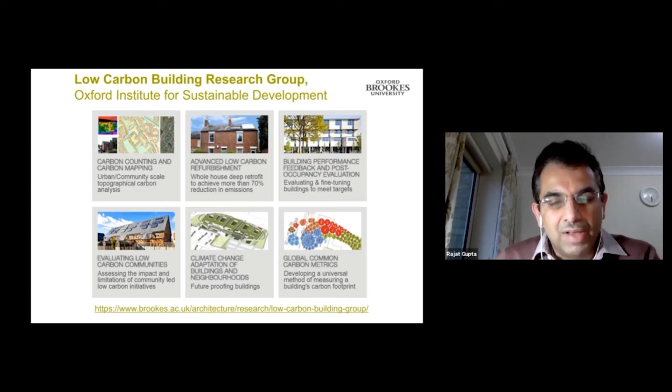I run the Low Carbon Building Research Group, and I'm also lead for the Oxford Institute for Sustainable Development at Oxford Brookes University. We have a range of themes we address through our research, whether it's low carbon or low energy mapping, looking at low carbon refurbishments in terms of both advanced refurbishments and also scaling up retrofits at neighborhood city scale. We've developed a lot of local energy mapping approaches for this.

We also look at smart local energy systems research and low carbon communities, focusing also on climate change adaptation of buildings and neighborhoods, so looking at climate resilience. A key area of our work is looking at care settings and the older population at the moment. We're also heavily involved in measuring indoor air quality and productivity in buildings.

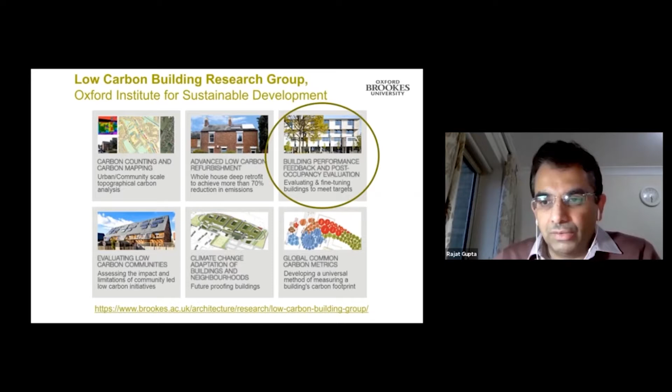A core part of our work is looking at building performance evaluation and post-occupancy feedback from buildings. We've done numerous studies, probably covering more than 500 buildings now internationally. And that's what I would like to reflect upon.

I'm also leading a lot of research in India in terms of sustainable buildings. Recently, we finished a project called MaS-SHIP with TERI and Development Alternatives, as well as UN Habitat in India. MaS-SHIP is really a project looking at mainstreaming sustainable social housing in India. We've developed a new sustainability assessment tool and a decision support toolkit for housing developers and government agencies to be able to design and deliver sustainable social housing in India.

Because as you know, there's going to be an explosion of housing under the Housing for All initiatives, and it definitely needs to be sustainable. For the first time, I think we also conducted resident surveys at large scale across some of these social housing developments. And we gathered some data on lived-in experiences of residents. There's a website, you can get a lot of information there.

The other project I'm doing is called Reside, which is a 5-year project with partners in Jaipur and Hyderabad. Essentially, this is looking at residential building energy demand reduction in India. We are looking at all aspects of residential energy use, right from the form, the building envelope, looking at appliances inside, and most importantly, occupant behavior.

We're developing protocols for post-occupancy evaluation for housing as part of the project, providing for the first time a large knowledge base for the residential energy code and its improvement and evaluation. As part of the project, we'll be monitoring about 2,000 homes across all climatic zones in India, looking at their energy and environmental performance, as well as contextual data, and then building models both at community level and at dwelling level. This project is continuing. Again, there's a website there for you.

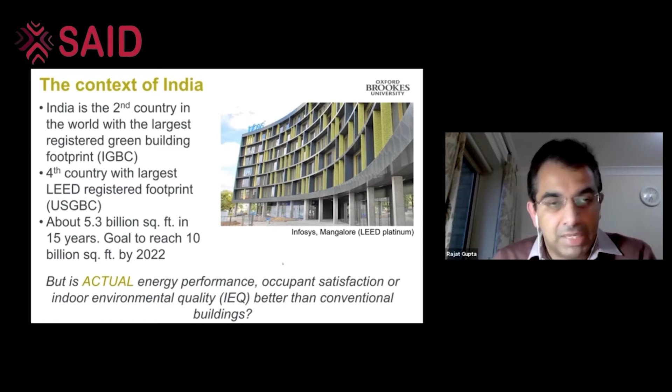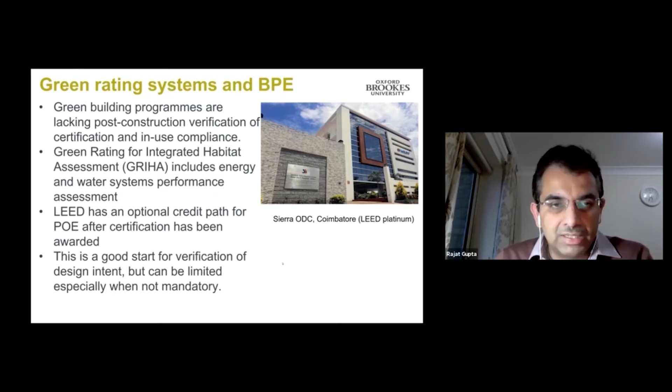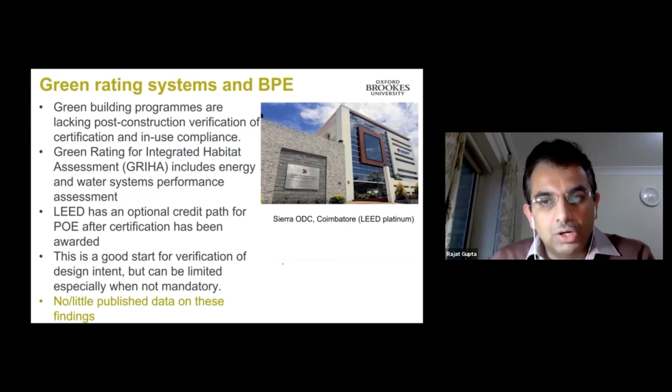So in India you have a range of green rating systems. Most of them lack post-construction verification of certification and in-use compliance. GRIHA, the indigenous system we have, does include some aspects of energy and water systems performance assessment, but it's not a mandatory requirement like in LEED, which also has an optional credit path. So this is a good start for verifying design intent, but because it's not mandatory, this can be limited. And as I said before, there's very little published data on these findings - I think that's one of the major issues we have to address.

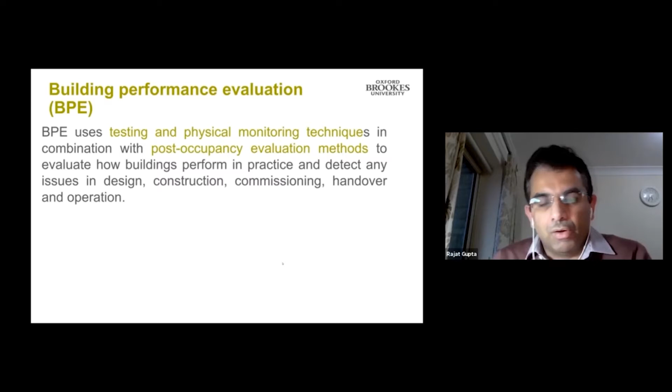Building performance evaluation itself, what does it really mean? It's really an approach which is very empirical and evidence-based, grounded in the real world. It uses social science and building science techniques to test and monitor, in combination with social science methods like surveys and interviews with occupants, to really evaluate how buildings perform in practice and detect any issues in their design, construction, commissioning, handover or operation. Essentially, findings from such studies can help fine-tune building performance, meet design targets, improve occupant satisfaction, and close the gap between simulation and reality.

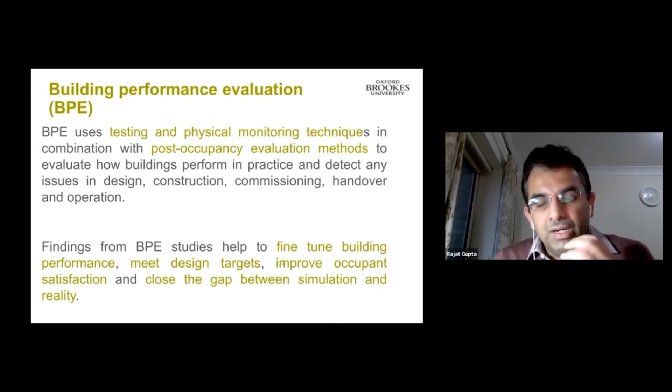It's not easy to do because your lab is really the real world. There are lots and lots of dynamic factors at play because you can't control all the variables. So you need a lot of multidisciplinary approaches to be able to do a good building performance evaluation.

So this is where we come in. We designed the LearnBPE research initiative as a UK-India collaborative project funded through the Newton Fund. The main aim of the project was to develop new knowledge, tools and skills amongst researchers, students, practitioners, engineers and architects, to be able to evaluate actual performance of green buildings, to start with, in India, and validate these through student-led field studies. We were passionate about getting master's level students to look at actual building performance as part of their dissertations and build this kind of evidence base.

Just to stress, I'm not just talking about green buildings only - you can apply the methods to any building, it doesn't really matter. It's Oxford Brookes University and CEPT University leading it. We also had a series of industry partners: TERI, Terraveris, Edifice, and ASHRAE India was also a partner in the project. We've produced a lot of outputs and they are available - I would welcome you to visit our website and download some of the papers, and you can see the final report as well that's published there.

We were very pleased that while the project was ongoing, our professional body CIBSE, the Building Service Engineers body, took on the LearnBPE publications and produced another paper talking about this new approach we had developed, called IBPE, for the Indian context. And I'm going to tell you all about that.

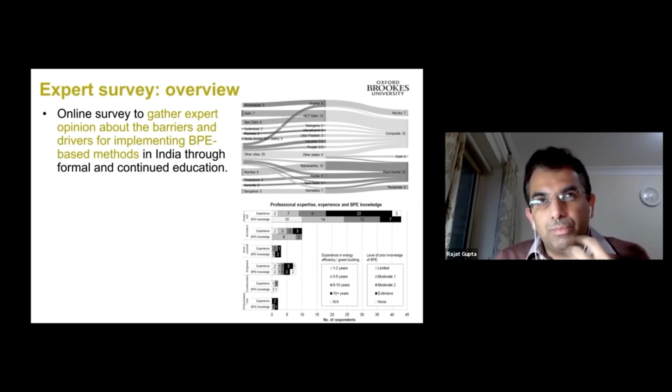Before I go in, I want to touch on the expert survey we did as part of the project when it started, to find out about building performance evaluation in India. We did an online survey to gather expert opinion about the barriers and drivers for implementing building performance evaluation in India through formal and continued education, since we think those are probably the first outlets of BPE, given the innovation involved in this research area.

We invited 68 expert respondents, most of whom represented the composite climate and warm humid climate of India, which probably covers most of the geography. Most had quite a few years of experience in green building and energy efficiency. It was more of a Delphi kind of exercise done with 68 respondents to get their view - a very informed audience from different parts of India.

65 of the 68 respondents agreed that BPE is necessary in India, which is really interesting, because until Learn BPE, there was relatively less work on building performance evaluation in India.

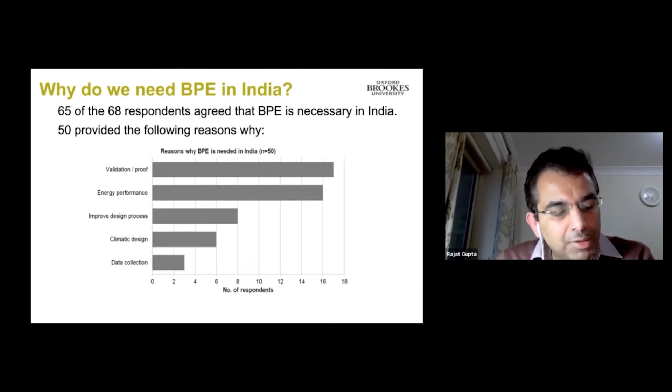50 of them provided reasons why, and clearly validation of design comes across as one big reason. Energy performance comes across as another reason - to verify whether it's happening as predicted, and also then improving the design process. But I think the key thing to note are the barriers to embedding this in education.

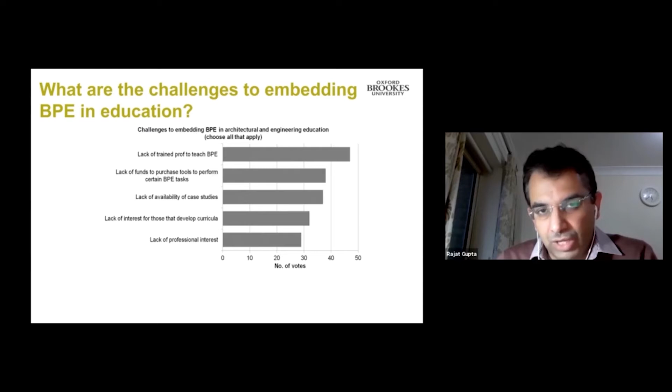We asked them what were the barriers in embedding this into architectural and engineering education. Obviously, the first one was lack of trained people to teach BPE. So that's where our project comes in, because we are passionate about getting this into the curriculum and getting faculty of different colleges also trained in BPE.

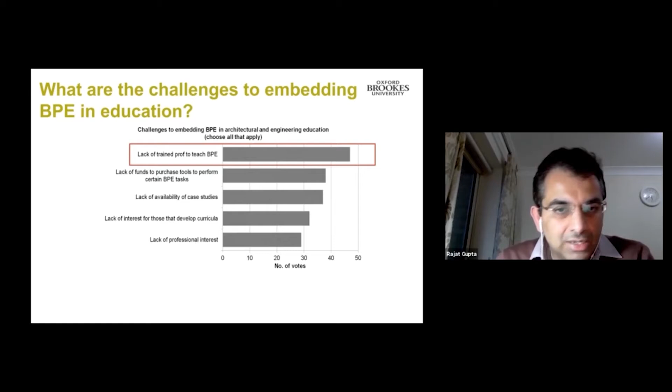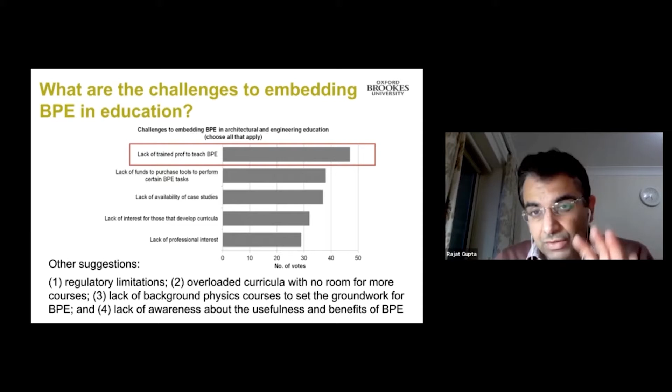Of course, there are other barriers like lack of availability of case studies, lack of professional interest, lack of funds to purchase tools, and others as well, like regulatory limitations, lack of background physics courses - because you need a bit of building physics knowledge for doing building performance evaluation. It was very interesting at the start of the project to know these barriers and which ones we could really address.

We also asked them about BPE methods, because you can have a lot of methods in building performance evaluation, to see which ones they considered to be very important.

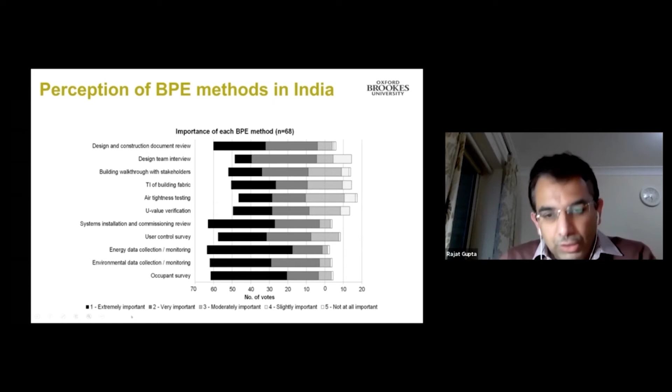So we took this learning from the surveys, and then assessed the barriers we had to look at for fostering BPE in academia and practice - whether this was lack of policy initiatives, because you do need a market pull, but you also need a policy push as well.

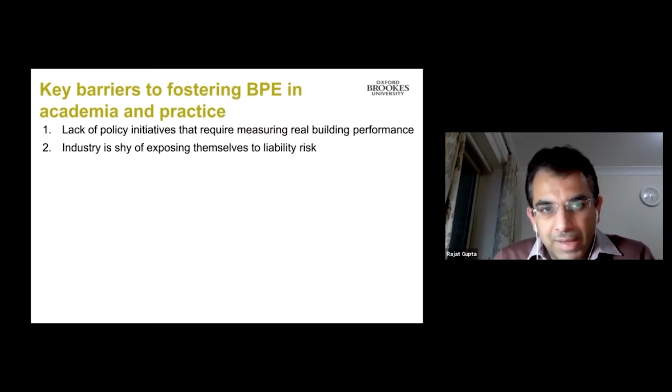There are these barriers: industries are obviously shy of exposing themselves to liability risks, professionals don't want their work to be judged, it's expensive, and you may not have the necessary skills - hopefully our project addresses this to some extent. Time and resources are also an issue, obviously, there may be costs.

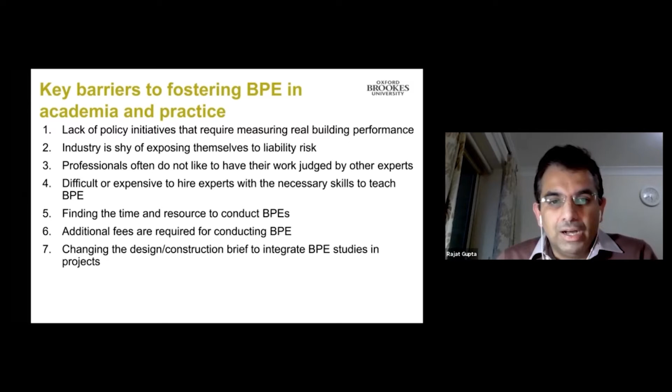You might have to change the design construction brief to integrate building performance evaluation. You might have to make changes in architectural or engineering curricula, or even identify suitable buildings. Because remember, building performance evaluation is not about building models or running simulations in your office.

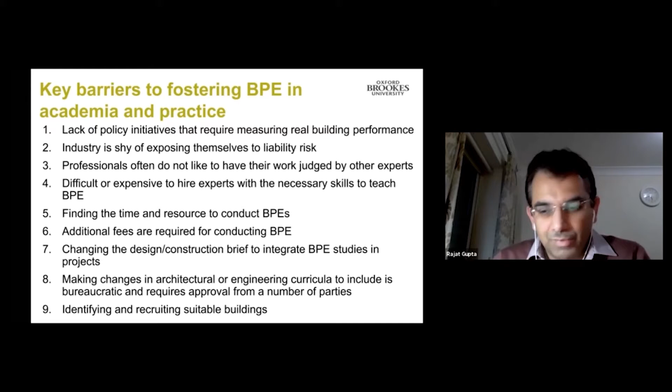It's about going into buildings, getting your hands dirty, studying the energy performance, the environmental performance, the experience of occupants in those buildings, taking all that physical data together with social science data, bringing it together and making sense of why certain buildings are doing well. Is it because of building-related factors about the design, the form, or the construction, or is it more softer aspects - is it because people are managing it well, managing energy use, or about the experiences of users? You need to differentiate between the building factors and the people factors, whether the building is working or not.

Before we go into case studies, it's important to set the framework so that it can be used for any studies in India.

And we published this paper in BRI journal, which looked at customizing a performance evaluation approach for the Indian context. It's downloadable freely, it's open access, so you can download it. But what's really interesting is that when we looked at this paper and got this framework published, it's been downloaded more than 3,000 times now.

This framework has become quite popular because what we've said here is a very open and flexible framework where, as part of building performance evaluation, there are 5 elements that need to be included: some form of review of design intent, so where are you coming from, what's the baseline or what's the context, then a technical building survey to look at building quality and services.

Energy assessment, for example, looking either through meter readings or energy bills, or even continuous monitoring if you have a BMS. Environmental monitoring, so you look at temperature and relative humidity and other indoor air quality measures, maybe in terms of indoor environmental quality as well.

And then gathering feedback from occupants, whether that's through a survey, or through an established survey like building use studies or others. And it's running over different levels, from level 1 to level 4. Level 1 is the kind of basic level, and level 4 gets more complicated in terms of time and expertise required.

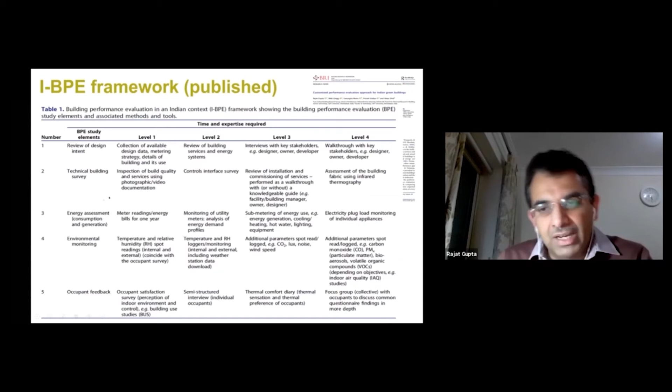So it offers flexibility to use different levels to deliver different study elements. You may do all 5, you may do a few, but at least you have a framework that you can follow. And then we applied this framework to different case studies, and you can see the highlighted bits of what we had done. So it's not necessary to do all levels for all study elements; you can pick and choose these different elements.

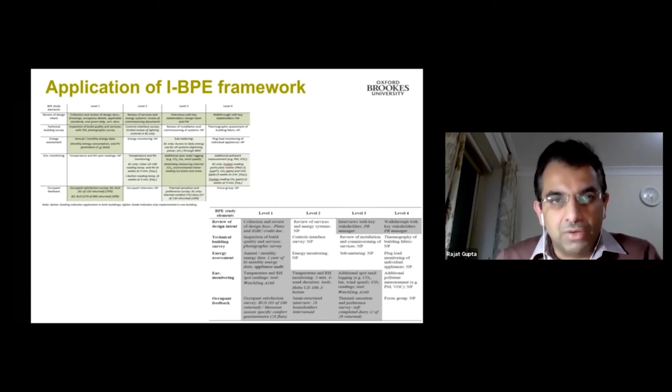And this can differ from different case studies depending upon access, depending upon the objective of the study and resources involved, as well as your own capacity to do the study. So we feel this is quite a flexible framework that can be used for doing building performance evaluation studies in India or elsewhere. So in order to embed BPE in academia and practice, we ran a lot of events as well, because there's no good in developing technical stuff without training.

So we had train-the-trainer workshops, we had summer and winter schools, we had classroom-based courses. Both in the UK and in India, we ran building performance evaluation modules, and we taught about 15 to 20 postgraduate students as part of that, for 2 years.

We also had dissertations for kind of 6-month studies, where we had a lot of dissertations that were done as part of the study, which actually led to all the studies that I'm going to talk about.

And there you see us running these -- these are students of Brookes and CEPT University doing some of the studies. We ran sessions in Delhi. This is in TERI, this is in Jaipur, in one of the institutions there.

In the end, we had about 8 students who studied these 10 case studies that I'm going to talk about, 6 of which from Oxford Brookes, 2 from CEPT University, looking at all these sustainable buildings. And I'm sure you recognize some of these buildings -- they're pretty well known.

We looked at 10 green building case studies across India. This is probably one of the larger data sets of green building performance -- I mean actual performance, not model performance -- covering different climatic zones. So we covered all the major climatic zones, I would say: hot and dry, warm and humid, and of course composite. We have documented about 1,000 occupant surveys along with monitoring data.

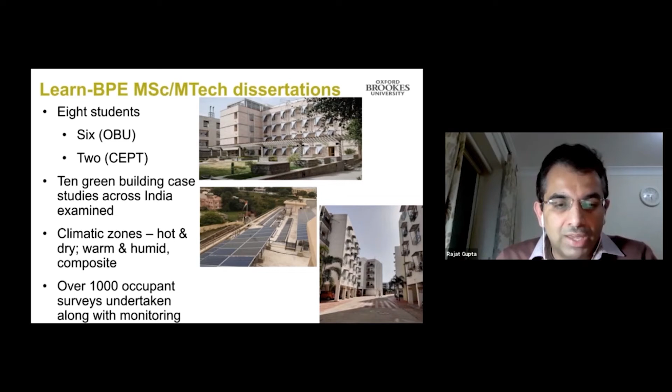So again, this is probably a large data set, looking at doing occupant surveys through building use studies data. So it's a very robust data set. So what were the insights from the case studies? I don't have time to go through every case study, so I'll try and give you some overarching findings and end with some final thoughts, because I think there are some nuggets of wisdom to take from there.

So again, it's one of the very few studies which has looked at the actual performance of so-called green rated homes in India. And we managed to do that across all 3 climates: warm and humid, composite, and hot and dry.

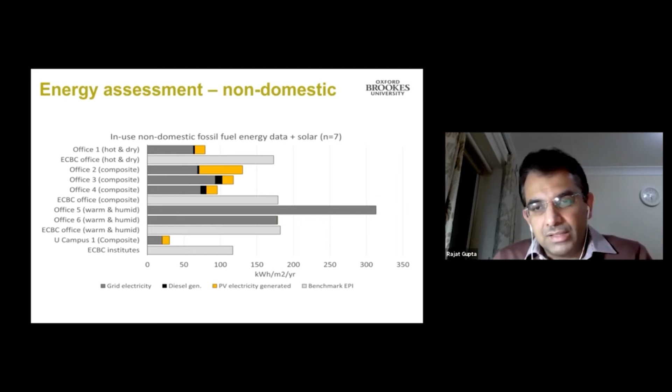Apart from one or two, where Office 5 is actually doing much worse, whereas Office 6 is actually same as the benchmark, and the university campus building is probably doing the best. It has a very low carbon footprint and energy use. But you can start to see different buildings against this EPI, kilowatt hours per square meter per year.

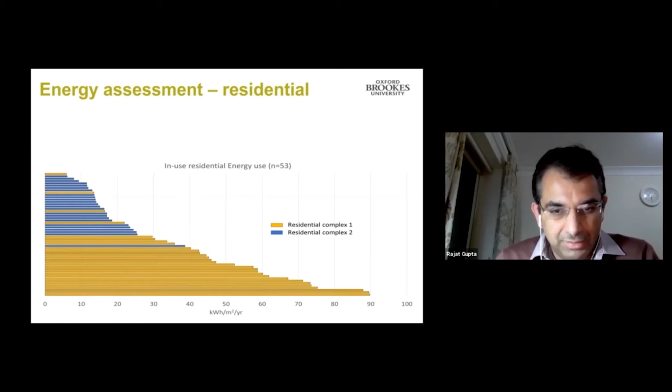We also had similar things for the residential projects. So these are two residential projects. There are 53 dwellings and flats within there. There are two complexes, one in hot and dry, the other in warm and humid climate.

You can see the mean EPI is around 35 kilowatt hours per square meter per year, but the range is very wide, which is what you would probably expect. If I did the study in the UK as well, domestic buildings tend to have a larger range, so you need to look at the median and mean as well.

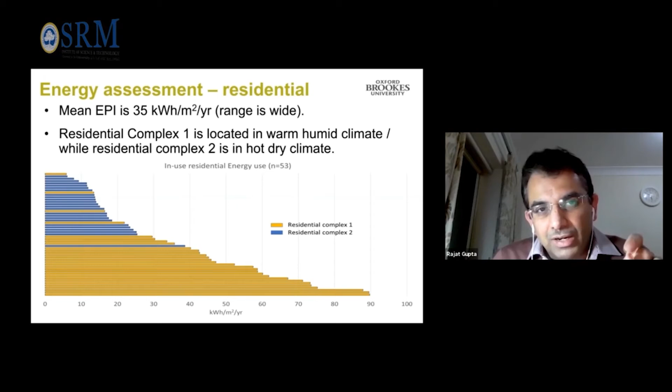So to give you context, 35 kilowatt hours per square meter per year is probably quite good, and it could be improved, but comparing internationally with conventional buildings, it's doing much better. It's important to start looking at energy use this way, both normalized by area, but I also think we should normalize energy usage by number of occupants, so you also have a unit of kilowatt hours per occupant.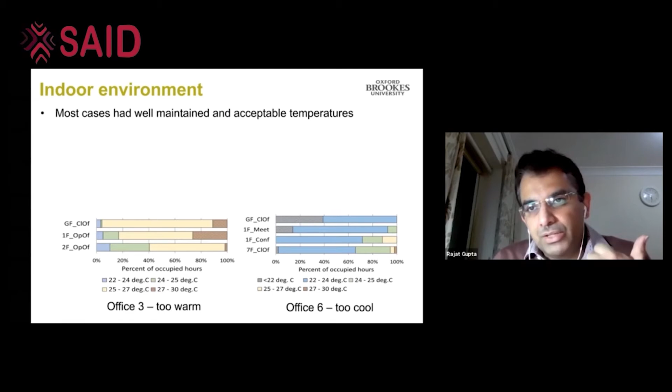Just to give you some flavor of what happened in terms of our monitoring, because we were monitoring these buildings in terms of their indoor temperature, relative humidity, and even CO2 levels, which is a good indicator of ventilation levels. For most of them, it's not bad news actually.

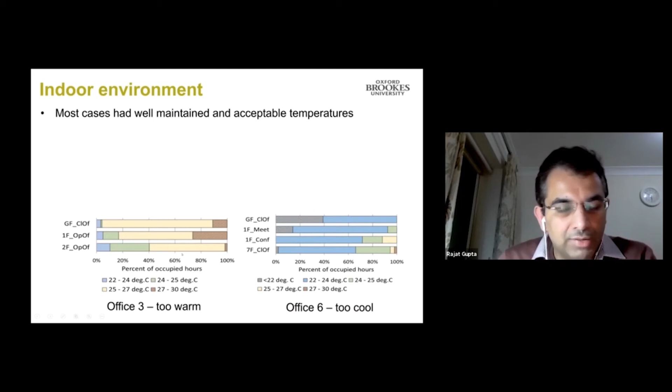They had well-maintained acceptable temperatures, usually staying below 30 degrees, which is quite good in India, usually around 24, 25. Some spaces we found were overly cooled or too warm as compared to the ISHRAE standards, which actually cross-related well with the occupant perception. So there was this overcooling happening, I think, in Indian buildings, especially the ones that are tightly controlled, which can be reduced, and energy savings would happen.

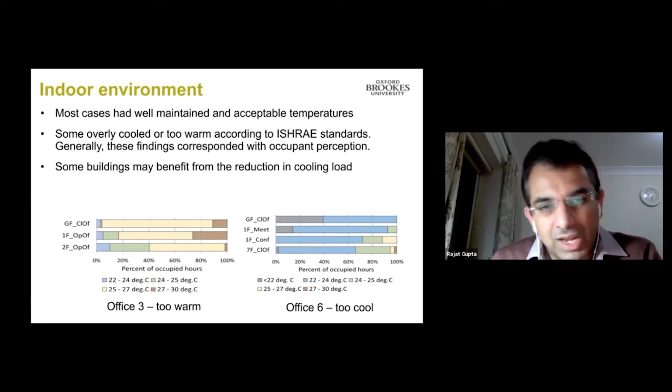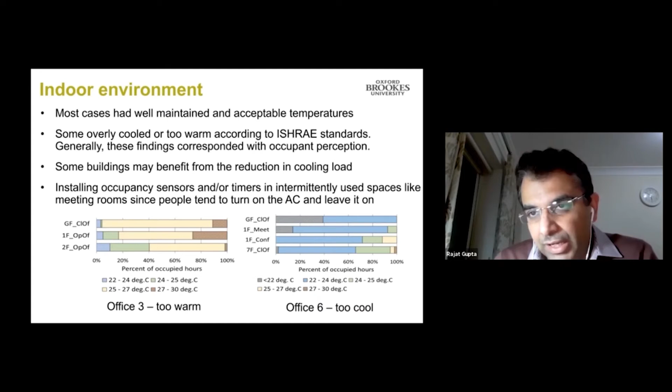We also found there's relatively less in terms of sensors and building control, because I think what buildings really need is, once they are built properly and managed well, you also need some kind of control system to keep that management going. Whether it's sensor driven, where you can reduce the usage of air conditioning, wastage should certainly be encouraged against, and overcooling and overheating should be addressed. Although given the climate in India, overcooling is probably the bigger issue now.

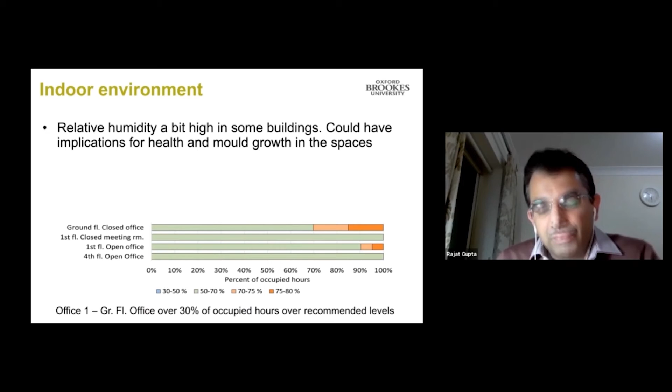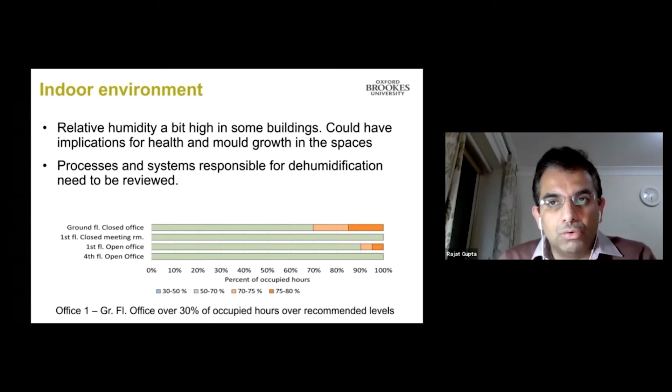In terms of humidity, we found that in most of the spaces it was okay, below 70%, between 50 and 70%, which is what you would expect and like to have. But in certain parts, with relatively less ventilation, there were quite high humidities. It's worth thinking about dehumidification in these buildings, because we don't want humidities going above or around 80%, since that can encourage mold growth and probably isn't good for health either.

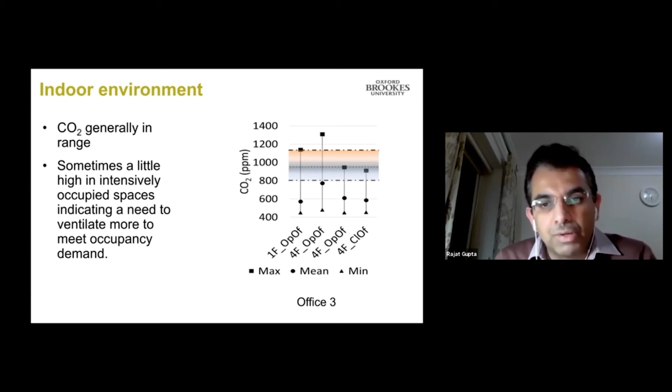So maybe the ventilation strategy needs to be customized for occupancy demands, because given the COVID and pandemic time we live in, ventilation of spaces has become of paramount importance, of course.

Then occupant perception is an interesting one. In the non-residential buildings, we were using BUS surveys, and BUS, if you don't know, has a scale of 1 to 7, where 1 is unsatisfactory and 7 is satisfactory. You essentially measure occupant perception of their indoor environment.

We found that the majority were satisfied with their overall air quality across all seasons. The green means it's doing better than the BUS benchmark, and it's also, of course, towards satisfactory. So it's doing well, and most of them were satisfied with the overall temperature.

There were some things about winter temperature, which comes up quite a bit. I think what's happening is that most buildings in India are designed to keep the heat out in summer, which is probably the predominant factor, reverse of what happens in the UK. But in the composite climate, you do have a cold season with a few months being very cold, and I think that's where probably indoor temperatures are not up to satisfactory levels.

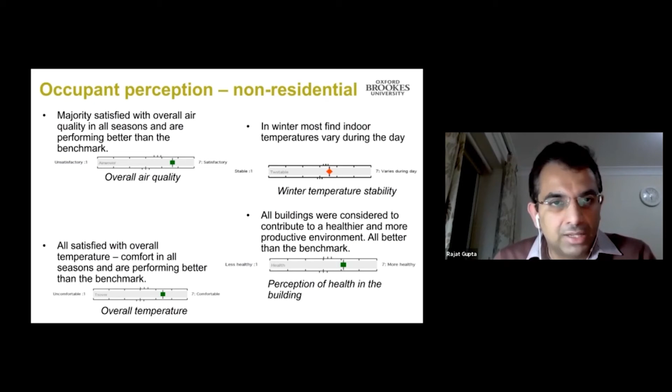But overall, the green buildings were perceived to contribute to healthier and more productive environments and were better than the benchmark. Again, on the residential side, when you look at the survey results, you find interesting things coming up in terms of winter air quality. Again, it's not as good in winter indoor temperature, but the summer one was okay. I think that's something to reflect upon, that we need to be designing housing and non-residential buildings to work in both summer and winter. Otherwise, you will not have satisfaction rates that are continuously okay.

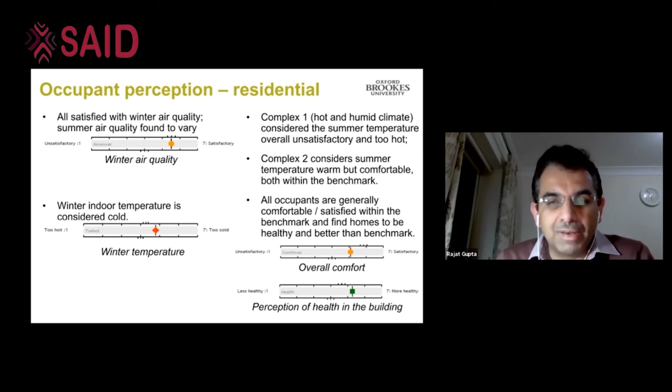But people's perception of health is probably still quite high. It would be interesting to repeat this post-pandemic and see how that's changed, because that would be interesting given people have spent more time in their homes.

So what are the final thoughts? I think I'd like you to go away from the presentation with certain reflections on what we have learned, besides the case studies, because the case studies are great and provide a lot of evidence. But it's important to reflect upon what is the future for building performance evaluation for India, and what are the lessons. I think first, the context in India is different to other countries, because there's fewer documentation of design decisions.

There's larger degrees of freedom during construction to change design specifications. There's also an issue of supply chain, that you're going to get fewer tested and certified products in construction. There's less formalized building operation, and there's limited access to monitoring equipment. So BPE has to operate in this context. It's not a context which is going to be data rich and will have access to expensive monitoring. It's probably true for many other countries as well, but especially for India.

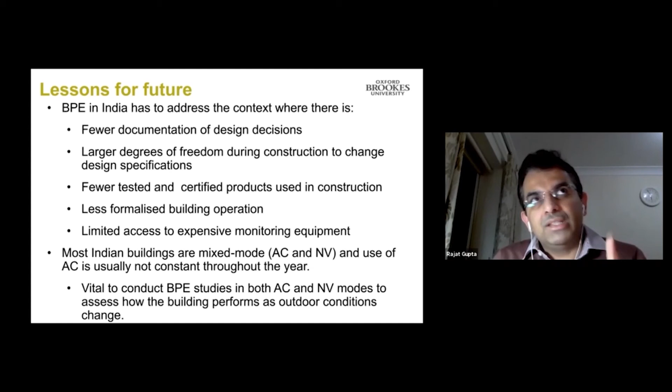Again, in the UK context, most buildings are heated, but in India it's going to be mixed mode. So the building will largely run as free running or with some fans, and for some months you're going to have air conditioning. The use of air conditioning will certainly not be constant throughout the year in the majority of buildings. So it's vital to conduct these building performance evaluation studies in both air conditioning and naturally ventilated modes, to see how the building operates as per outdoor conditions, and not just in one mode. That needs to be kept in mind when such studies are done, as to which mode the building is operating in.

The prevalence of the energy performance gap, which is pretty dominant across the world - essentially the difference between design intent and actual performance - did not seem to be significant in India. That might be because of two reasons; we are just hypothesizing what it could be.

That could be because expected performance goals of green buildings tend to focus on asset performance and sometimes don't address the dynamics of operation. So you're looking more at the building geometry and systems and less at the set points and occupancy schedules. We feel that going forward, this difference between asset performance and operational performance could enlarge this performance gap, because when you think of the model, you're making assumptions about set point, mode of operation, and occupancy schedules. In reality, the way the building is run in the Indian context may be much more significant, or different to what the model assumes.

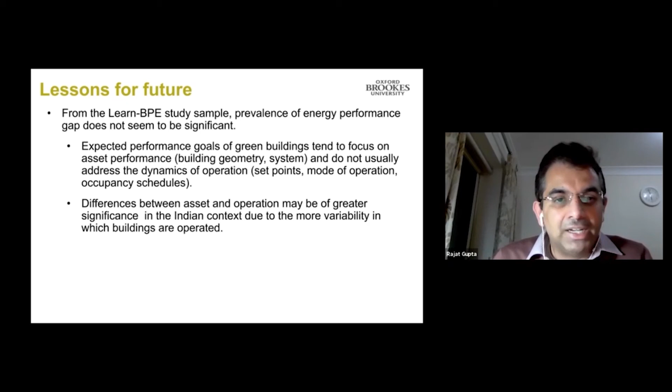And that might expand this gap. It's not there yet that much, but it may come in very quickly and may have a higher magnitude as well. So that must be kept in mind.

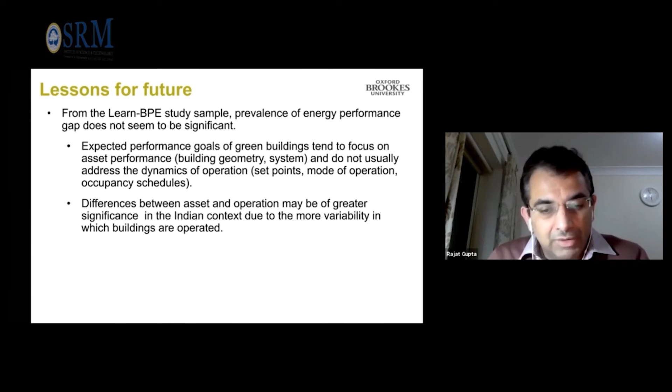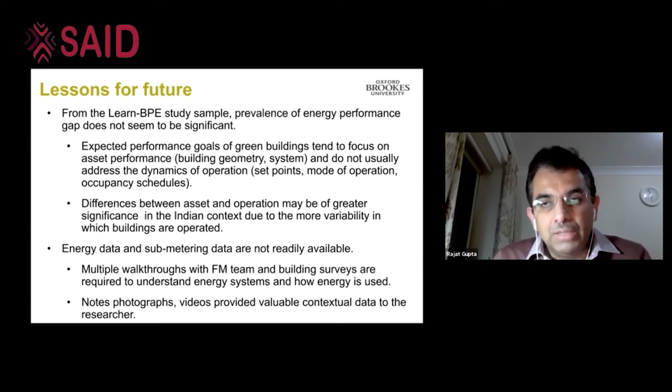The message for policymakers is that as more houses and buildings are delivered in India, building performance evaluation should really become part of that housing delivery. It should not be seen as an add-on, because the design team, the construction team, and even the client have a lot to benefit from this.

Another thing to keep in mind is we must have sub-metering arrangements designed into buildings, which are not readily available. So we had to do multiple walkthroughs, a lot of visits, and photographs and video surveys were done to provide contextual data to the researcher.

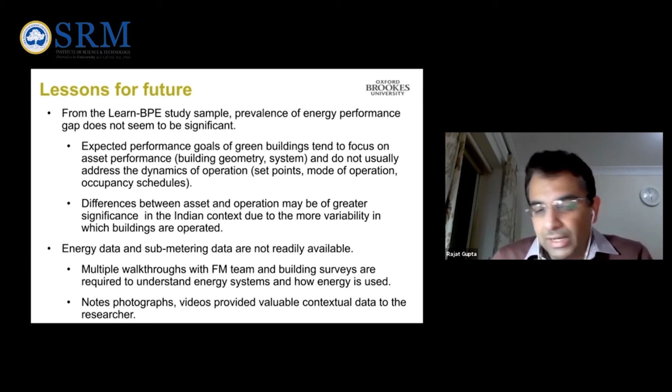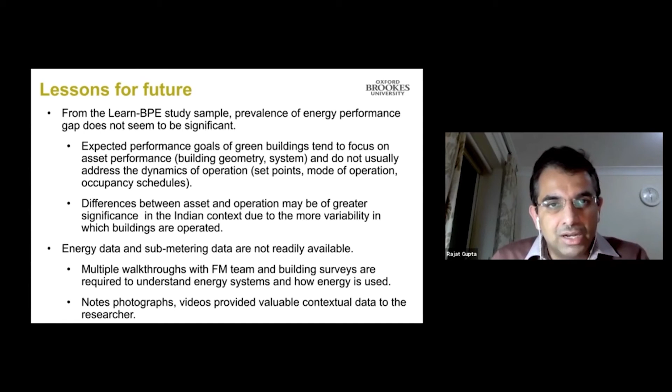You can imagine it's quite difficult to do during the pandemic, though these studies were done before that. But going forward, if that infrastructure is built into the delivery of buildings and the data streams are coming through, you can do a lot of intelligence and analysis using that.

Multiple levels of permissions are required in the Indian context, we find. So we need to have monitoring plans which are flexible and agile, because they need to have the ability to be customized.

Although we used imported questionnaires like BUS, which required some modifications, you couldn't use them as such. You had to have some climate and cultural considerations. The other thing to keep in mind is not just the questionnaire, but how you administer it.

In the UK context, or when I was in the US, we used to just drop off and collect the questionnaire, because people would fill it in and we could just collect it. That doesn't happen in India. You have to hang around while respondents complete the survey, otherwise they're not going to do it. You have to assure them that the response was important for the study. So it kind of triples the time to do these surveys, and that needs to be kept in mind.

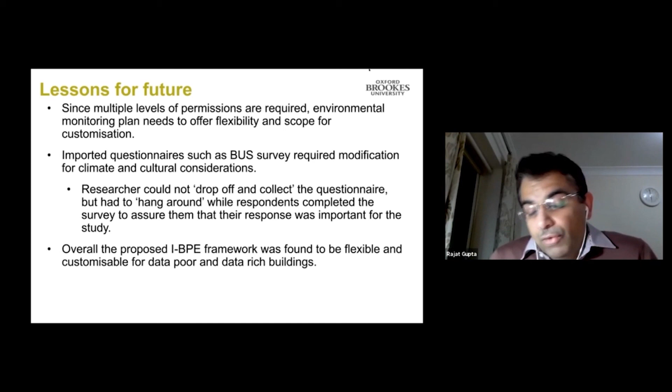Overall, across the 10 buildings, we found the framework we had developed was flexible and customizable, both for buildings that had BMS and all, and for buildings that were data poor.

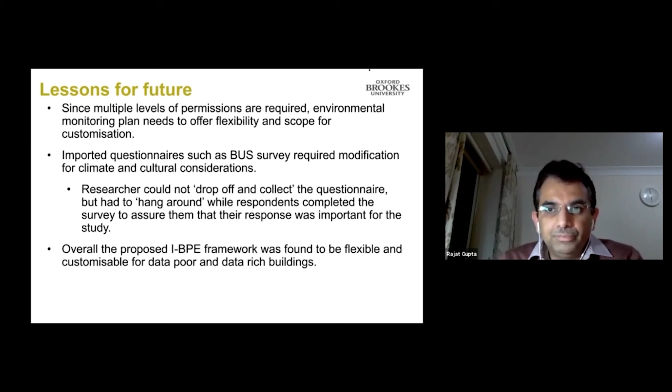The final message I would like you to take away is that building performance evaluation in India cannot just be driven by certification requirements of green buildings. Because you're going to get a building rated, you also need to do BPE. I think certification alone would influence a very small part of the building stock.

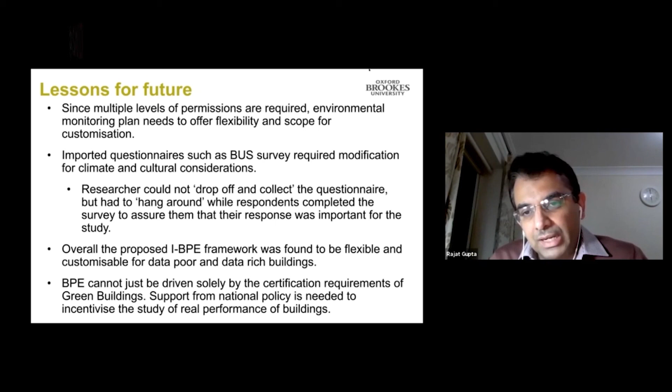What you really need is support from national policy to incentivize the study of real performance of buildings, because without having that real data, you can't have evidence-based policies, which is what India urgently needs, given the scale of development and urbanization happening at the moment. We must ensure that the building stock we will have in the next 20 years is both sustainable and delivering what it was designed to do.